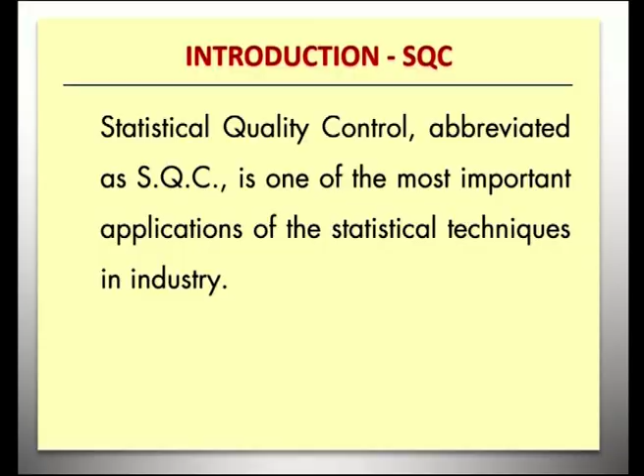Basically, what is meant by SQC? Statistical quality control, abbreviated as SQC, is one of the most important applications of statistical techniques in industry. We have studied various statistical techniques; all those techniques have to be applied somewhere. This important application of statistical technique is done in industry for the concept of quality control. These techniques are based on the theory of probability and sampling, and are being extensively used in almost all industries such as armament, aircraft, automobile, textile, electrical equipments, plastic, rubber, electronics, chemicals, petroleum, transportation, medicine - everywhere statistical techniques are applied.

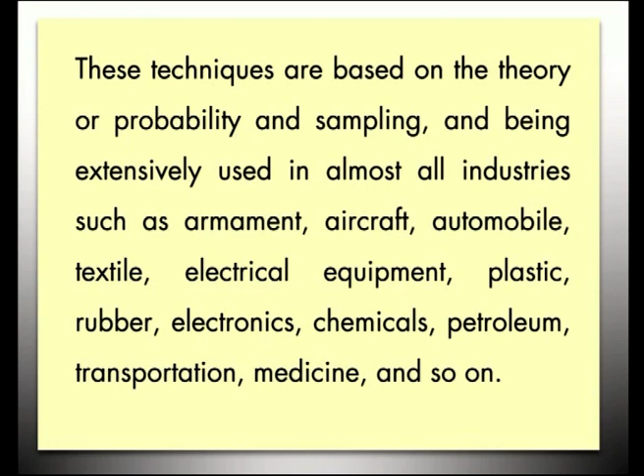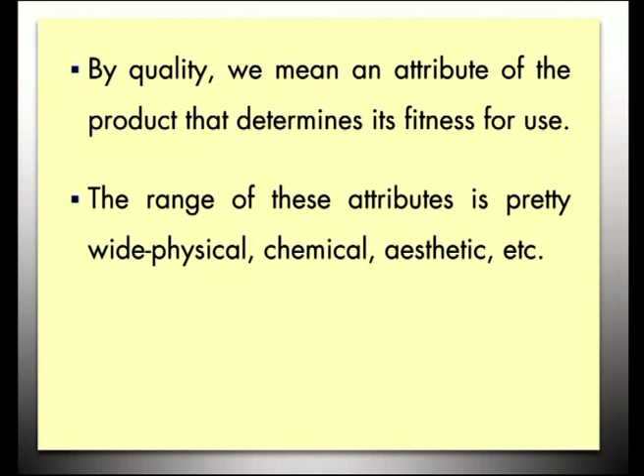By quality, we mean an attribute of the product that determines its fitness for use. The range of these attributes is pretty wide: physical, chemical, aesthetic, etc.

The important concept is synergy. What is meant by synergy? A product may have several aspects of quality as well as an overall quality - a particular quality in respect of a particular product - but when you talk about the overall quality compared to other products, it is something more than the sum of its individual quality aspects. So this property is technically known as synergy.

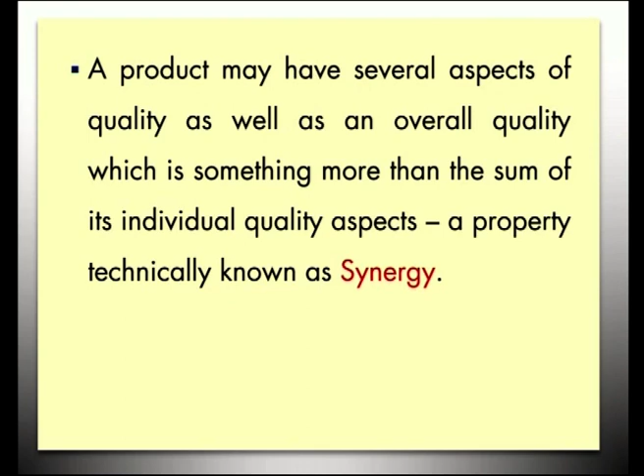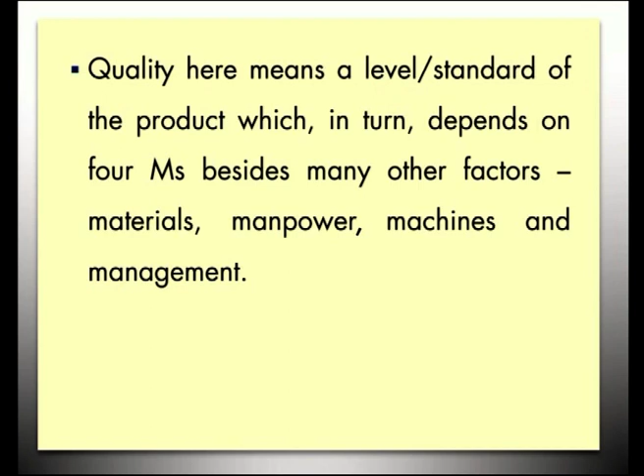So quality here means a level or standard of the product, which in turn depends on 4 M's. What are those 4 M's? That is materials, manpower is the second M, machine is the third M, and management is the fourth M. So actually, quality control is a powerful productivity technique for effective diagnosis of a lack of quality or conformity to settled standards in any of the materials, process, machines or end products.

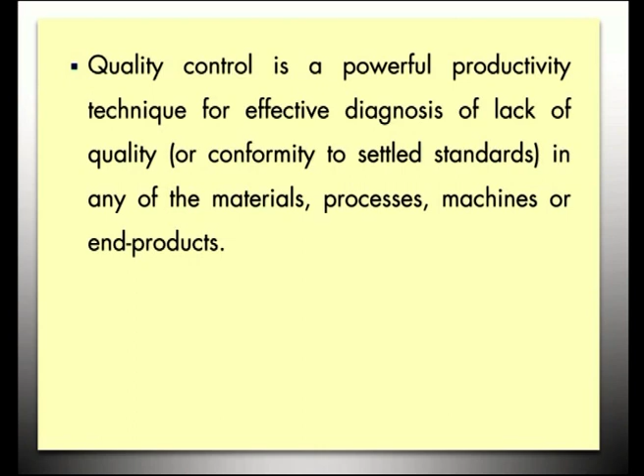In all aspects we have to talk about quality. That is, when you take the material for production, there also we should maintain quality - it should satisfy some kind of specifications mentioned for the material. After the material is applied for production, during the process also we have to talk about quality - again it should conform to settled standards. And when the process is going on, quality of machine also should be talked about, because the process should go on smoothly, so machine should function smoothly without any kind of problem.

So quality of machine is to be taken into account, and after the material is processed through quality machines, we obtain an end product. That end product's quality also has to be checked before it goes to the market. So quality everywhere has to be checked, whether it is for the basic raw material, during the process, the machine, or the end products.

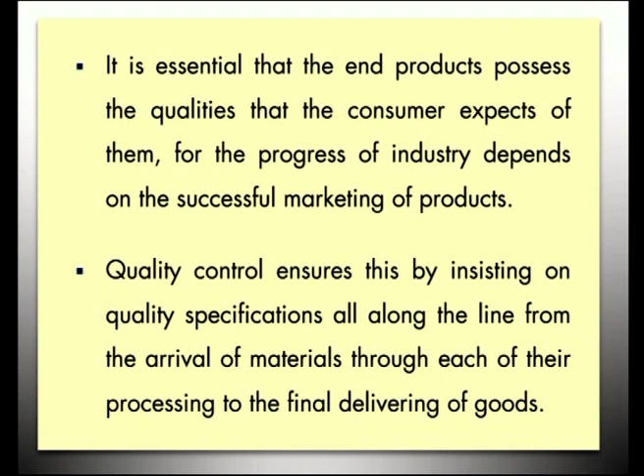It is essential the end products possess the quality that the consumer expects of them, for the progress of industry depends on the successful marketing of products. When the end product is of quality, the product will be successfully marketed and the industry gets its own benefit and profit. So quality control ensures this by insisting on quality specifications all along the line from the arrival of materials through each of their processing till the final delivery of goods.

As we talked about, there are 4 M's that have to be taken into account when we talk about quality control - materials, manpower, machine and management. So quality control therefore covers all the factors and processes of production, which may be broadly classified as follows. First of all, quality of materials: material of good quality will result in smooth processing, thereby reducing waste and increasing output, and giving better finish to the end product.

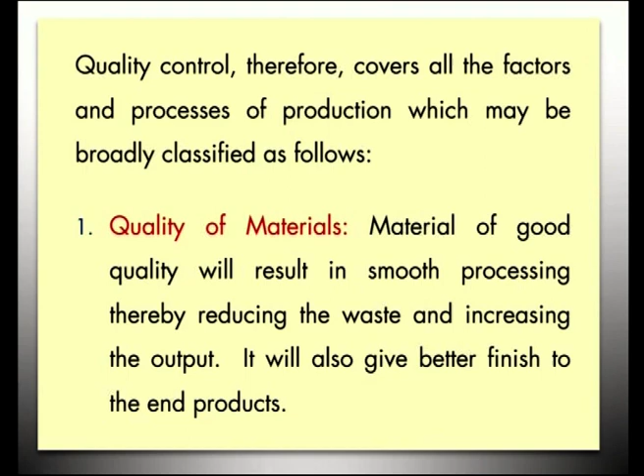Then next, quality of manpower. Who has to process the material? Somebody else has to process it, so manpower is very important when you talk about quality. That is, trained and qualified personnel will give increased efficiency due to better quality production through the application of their excellent technical skills, and also reduce production cost and waste.

If the personnel is not trained or qualified, then we may process the material so many times by trial and error method, and this will increase the waste products. So, trained and qualified personnel is very important because their application of skills will give better quality production and it will ultimately reduce the production cost as well as the waste.

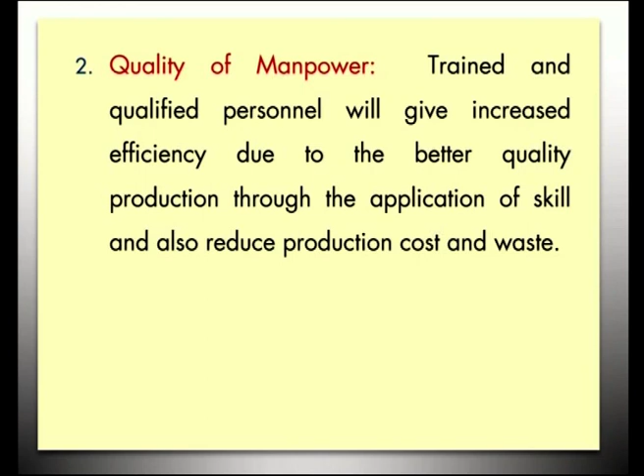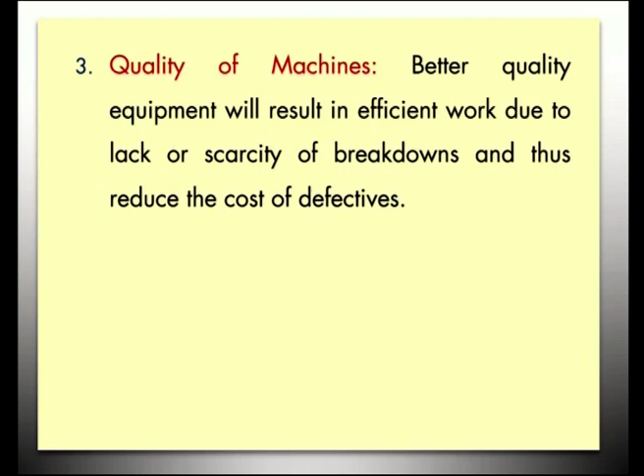Next, third M is machine. Quality of machines. Better quality equipment will result in efficient work, because once a machine breaks down, there is always a wastage of time, manpower, and materials. A smooth functioning of the machine will result in efficient work. Therefore, maintenance of machines with good quality is very important. Thus, it reduces the cost of defectives when quality machines are used.

The fourth M is management. Quality of management. A good management is imperative for increase in efficiency, harmony in relations, and growth of business and markets.

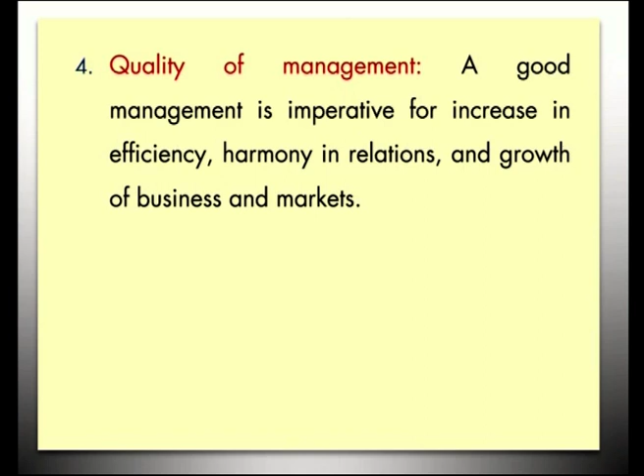What is the purpose of statistical quality control? That is, what is the basis of statistical quality control? Why the word SQC has come up, that has to be studied. The basis of statistical quality control is the degree of variability in the size or the magnitude of a given characteristic of the product.

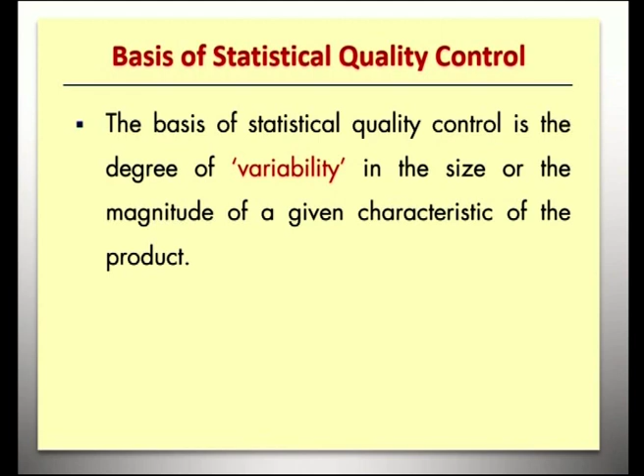Next, very important thing is what are the variable causes of variations in quality. Why the particular product is not up to the standard specified by the quality, we have to check about what are the causes of variations in quality. So, variations in the quality of a manufactured product in the repetitive process in industry is inherent and inevitable.

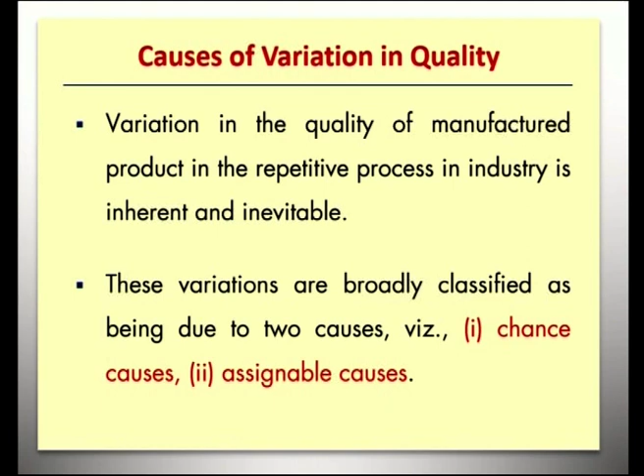So, the variations are broadly classified into two causes, that is chance causes and assignable causes. First of all, chance causes. Some stable pattern of variation or a constant cause system, which is very standard, we call it chance causes, is inherent in any particular scheme of production and inspection.

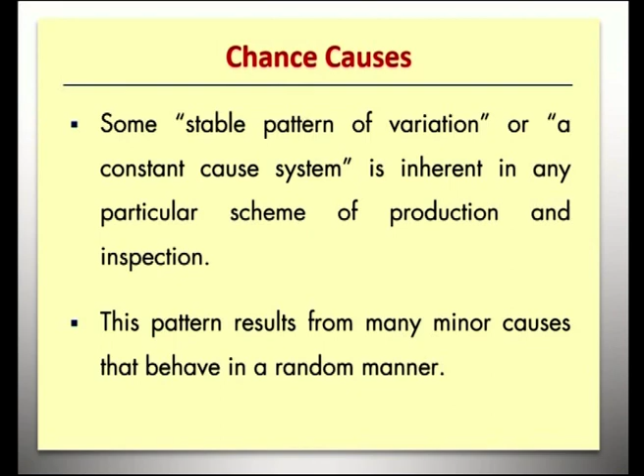This pattern always results from many minor causes that behave in a completely randomized manner. The variation due to these causes is beyond the control of human hand and it cannot be prevented or eliminated under any circumstances. So, we have to go along with the quality, keeping in mind the chance causes, keeping them in control so that it does not affect the quality of the end product. One has got to allow for variation within this stable pattern, usually termed as allowable variation.

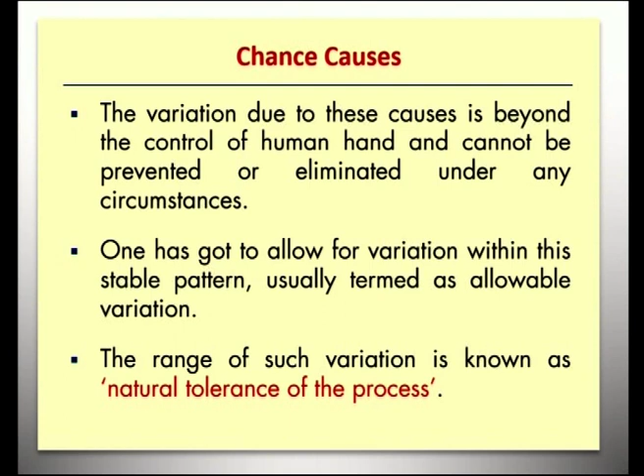So, the range of such variation is always called the natural tolerance of the process. We have to tolerate these causes because it cannot be eliminated, and we have to go along with the quality so that the end product is not much affected.

The next cause of variation is assignable causes of variation. This type of variation attributed to any production process is due to non-random, or so-called assignable causes, and is termed as preventable variation. When these causes of variation are present, they must be eliminated.

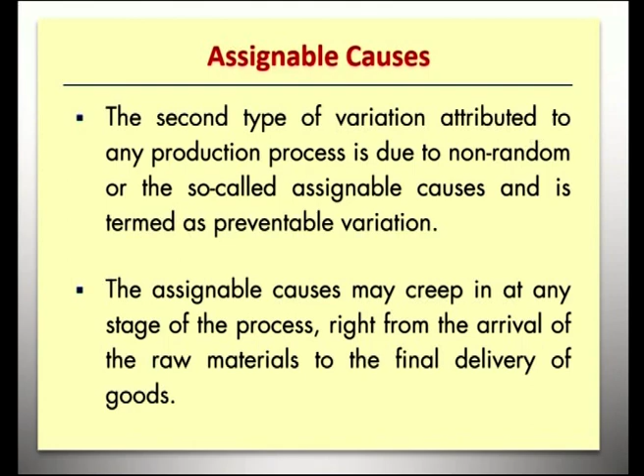The assignable causes may creep at any stage of a process, right from the arrival of the raw materials to the final delivery of goods. This has to be eliminated and it can be eliminated. Some of the important factors of assignable causes of variation are substandard or defective raw materials, and new techniques introduced for better production which are tested by trial and error method. These kinds of variations are called assignable causes of variations.

Also, another assignable cause of variation is negligence of the operators, wrong or improper handling of machines, faulty equipment, and unskilled or inexperienced technical staff. These are assignable causes of variations and they can be prevented.

For example, when you check the quality of raw materials, the first assignable cause, defective raw materials, can be eliminated. When you apply a new technique, if the quality is not maintained, just avoid using the new technique. If the operator is negligent, then you have to completely terminate the operator. If wrong and improper handling of machines is a cause of variation, then you have to be careful in handling the machines very carefully.

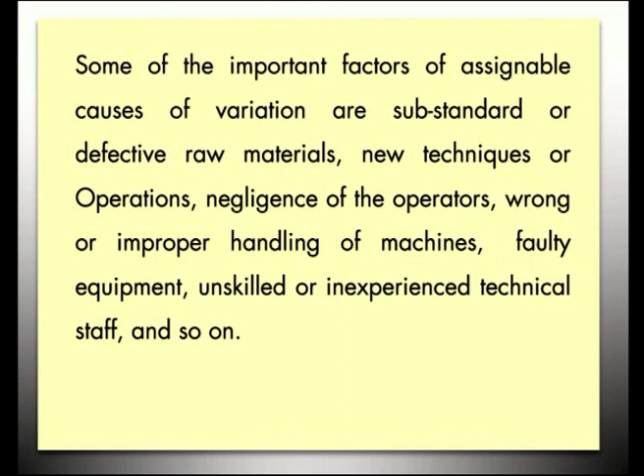And if there is faulty equipment, that equipment has to be avoided for production. If unskilled and inexperienced technical staff is present, then those staff have to be replaced with skilled or experienced technical staff for better production and quality production.

So, these causes can be identified and eliminated, and it is very important that they are discovered in the production process, that is, before the end product comes out, before it goes wrong, before the production becomes defective. Now, when you compare the chance causes of variation and assignable causes of variations, the following factors are compared.

Chance cause of variation consists of many individual causes, whereas assignable cause of variation consists of just a few individual causes. Any one chance cause results in a small amount of variation, whereas any one assignable cause can result in a large amount of variation.

Chance variation cannot economically be eliminated from a process, whereas the presence of assignable variation can be detected, and any action to eliminate the cause is usually economically justified.

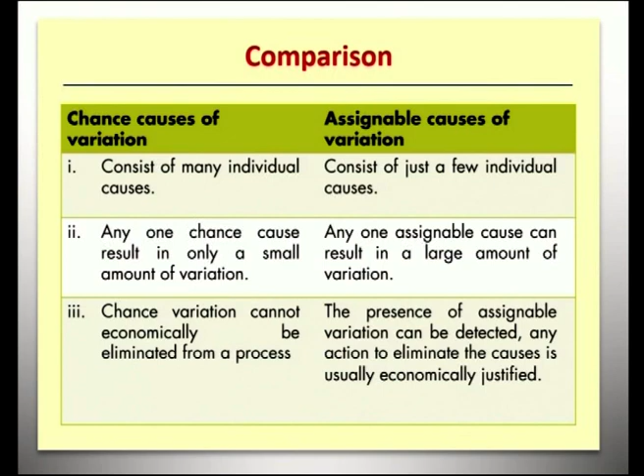Some typical chance causes of variation are slight vibration of a machine, lack of human perfection in reading instruments or setting controls, and voltage fluctuations or variation in temperatures. Whereas typical assignable causes of variation are negligence of operator, defective raw material, faulty equipment, and mishandling of machines.

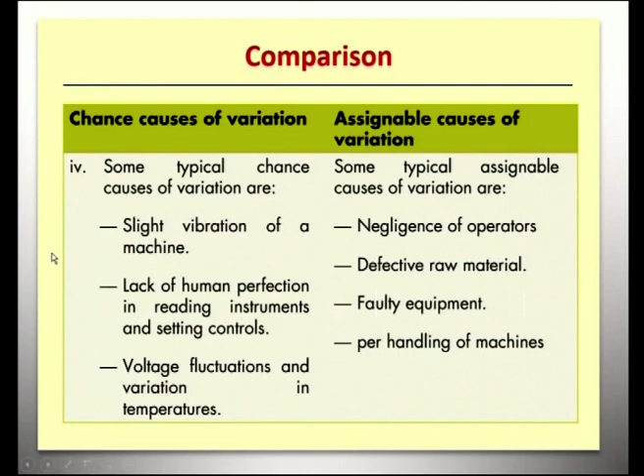Now, after studying about the causes of variation, when should we call the production process in quality control? Quality control in the sense of statistical quality control.

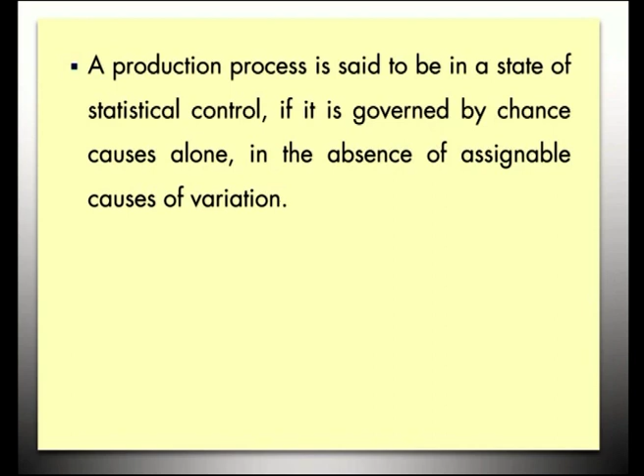A production process is said to be in a state of statistical quality control if it is governed by chance causes alone, in the absence of assignable causes of variation. That is, if assignable causes of variation are present, they must be eliminated, and only chance causes of variation are allowed, then we call the production process in the state of statistical quality control.

The basic definition given by Duncan is: SQC, statistical quality control, may be broadly defined as that industrial management technique by means of which products of uniform acceptable quality are manufactured. So, uniformity is very important and quality is important.

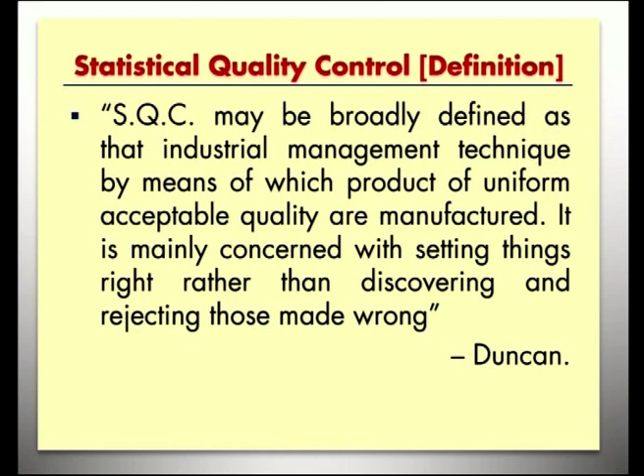It is mainly concerned with setting things right rather than discovering and rejecting those made wrong. So instead of discovering and rejecting afterward, we have to set it right beforehand. That is what Duncan says according to statistical quality control.

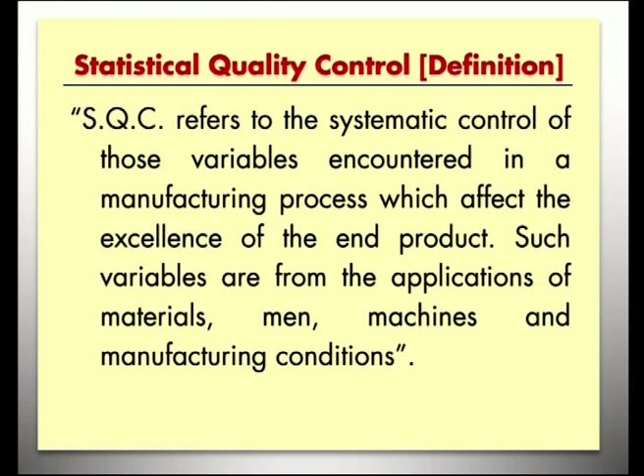Another author has given the definition for statistical quality control: it refers to the systematic control of those variables encountered in a manufacturing process which affect the excellence of the end product. Such variables arise from the applications of materials, men, machines and manufacturing conditions.

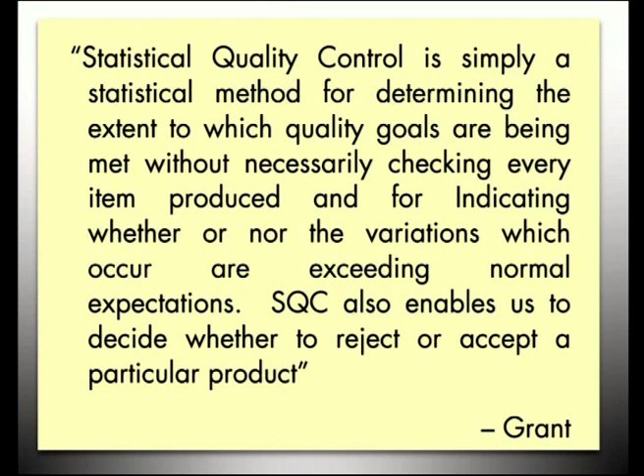Another author called Grant has given the definition as simply a statistical method for determining the extent to which quality goals are being met without necessarily checking every item produced, and for indicating whether or not the variations which occur are exceeding the normal expectations. So SQC also enables us to decide whether to reject or accept a particular product.

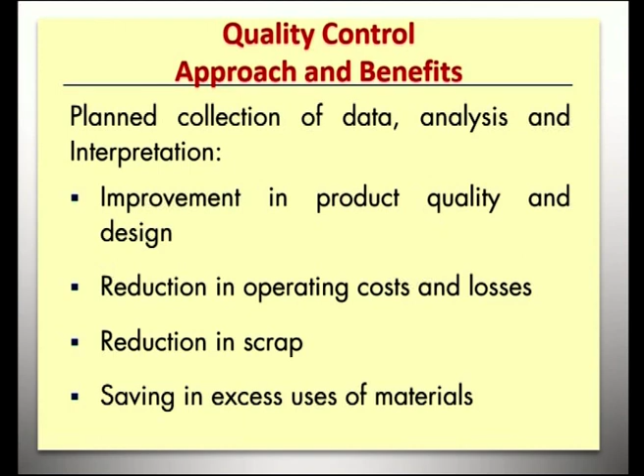Quality control: how to approach quality control and what are its benefits. A planned collection of data, analysis and interpretation, improvement in product quality and design, reduction in operating costs and losses, reduction in scrap, saving in excess use of materials, removing production bottlenecks and reduction in inspection.

Often stopping the procedure and inspecting also causes quality defects. Therefore, reduction in inspection, evaluation of scientific tolerances, improvement of employee morale - that is, by giving them allowances the employee will be happy enough to operate the machine - improvement of employee morale, maintenance of operating efficiency, quality consciousness, greater customer satisfaction - all these lead to enhanced productivity.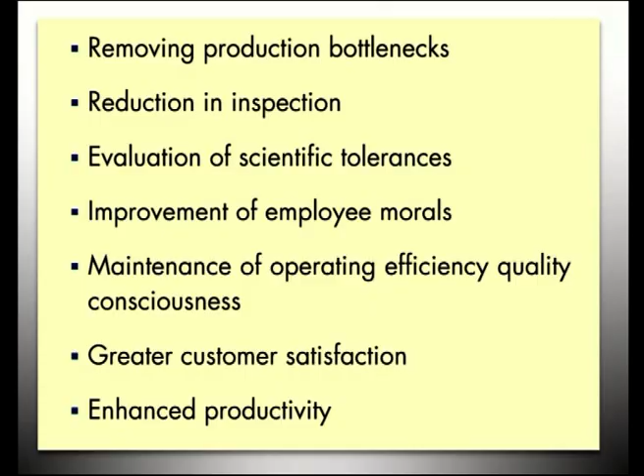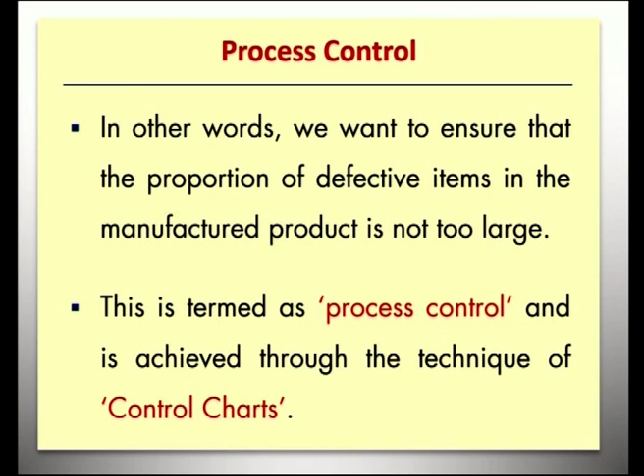Now, there are two types of statistical quality control: one is process control, another is product control. In other words, we want to ensure that the proportion of defective items in the manufactured product is not too large. This is termed process control, and is achieved through the technique of control charts.

The next one is product control. By product control we mean controlling the quality of the product by critical examination at strategic points, and this is achieved through sampling inspection plans.

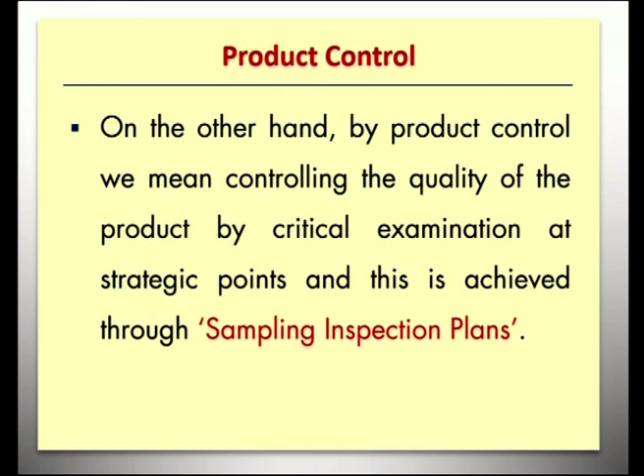So the first few episodes will cover process control, that is drawing various control charts, and the next episodes will cover various kinds of sampling inspection plans. Hereafter we will be studying in detail about process control and product control.

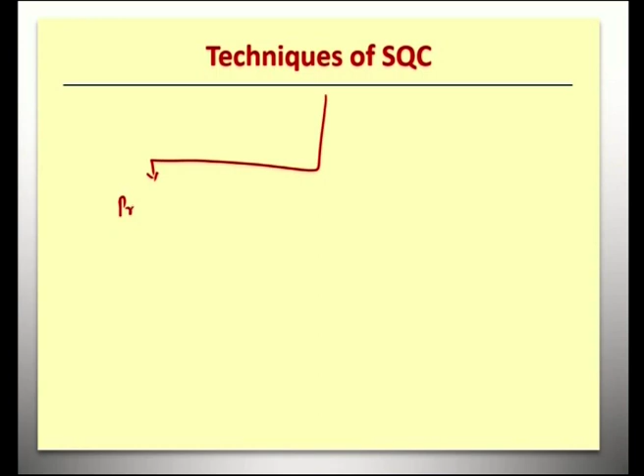First of all, we talk about process control. The basic techniques of SQC are broadly classified into two parts: one is process control and the other is product control.

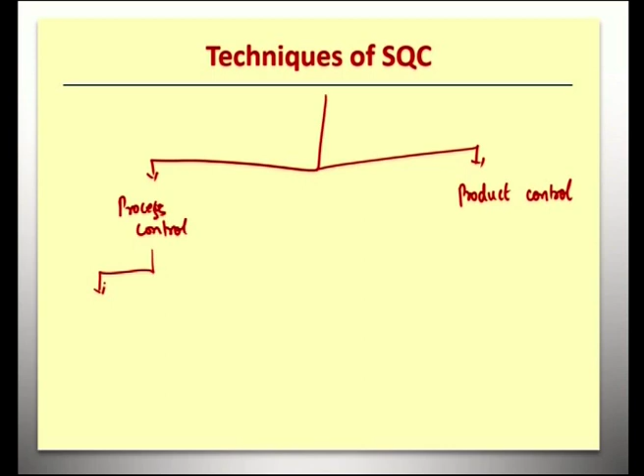When we talk about process control, this is done with control charts, and product control is done with sampling inspection plans.

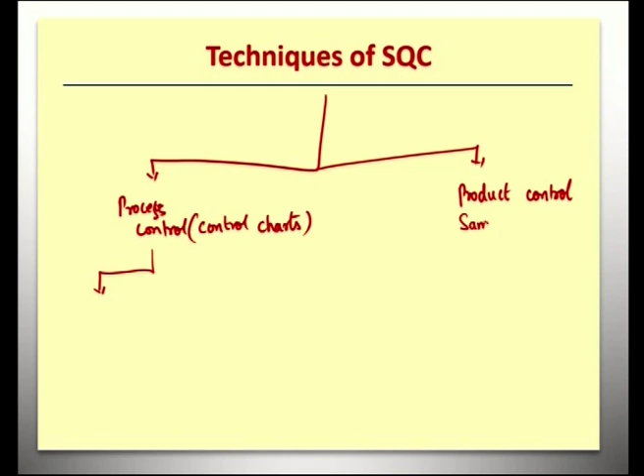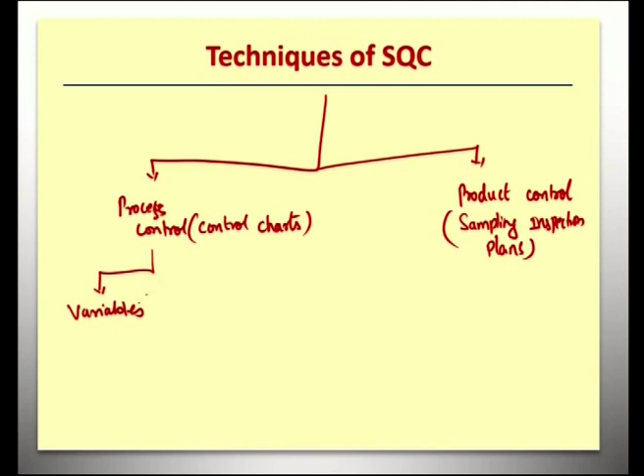Control charts are divided into two parts: control charts for variables and control charts for attributes. The term attributes we have seen in one of the courses called Statistical Methods too.

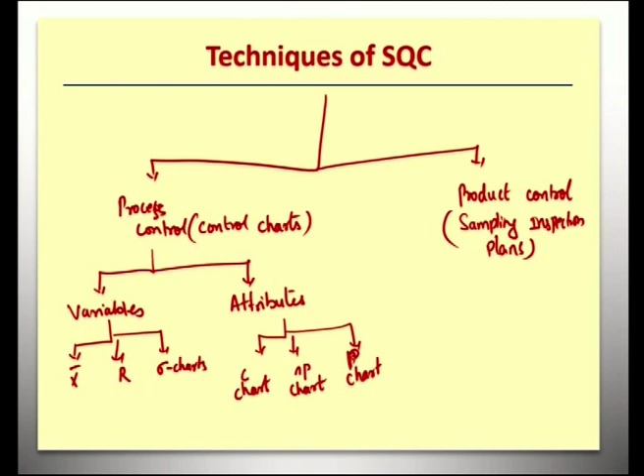Okay, so all these we are going to discuss. We are going to discuss about X bar chart, R chart, sigma charts with respect to control charts for variables. And in attributes, control chart for attributes we are going to talk about C chart, NP chart and P chart.

In product control, we are going to talk about sampling inspection plans for attributes and sampling inspection plans for variables.

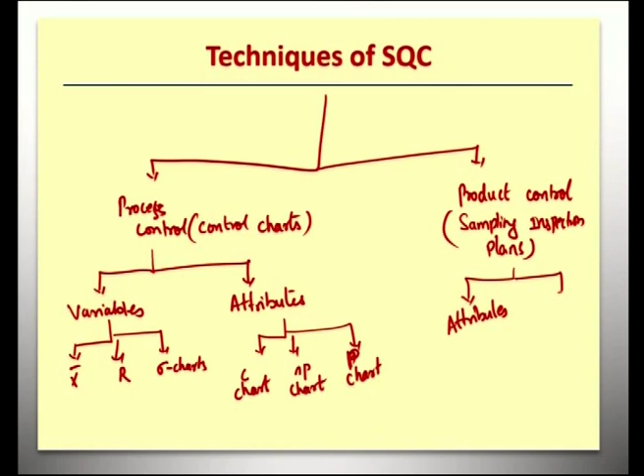Control limits or specification limits and tolerance limits. Process control, that is we will talk about control charts. So for control charts, these three types of limits are very important: control limits, specification limits and tolerance limits. We will see one by one what these limits are called.

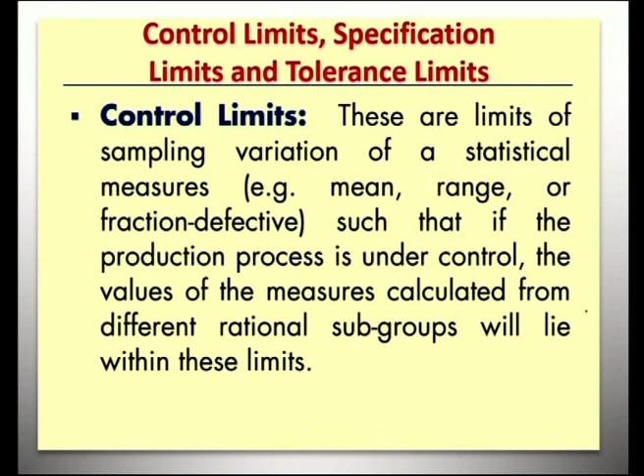Control limits are limits of sampling variation of a statistical measure, for example mean, range and fraction defective, such that if the production process is under control, the values of the measures calculated from different rational subgroups will lie within these limits. Then we say the whole process is under statistical quality control.

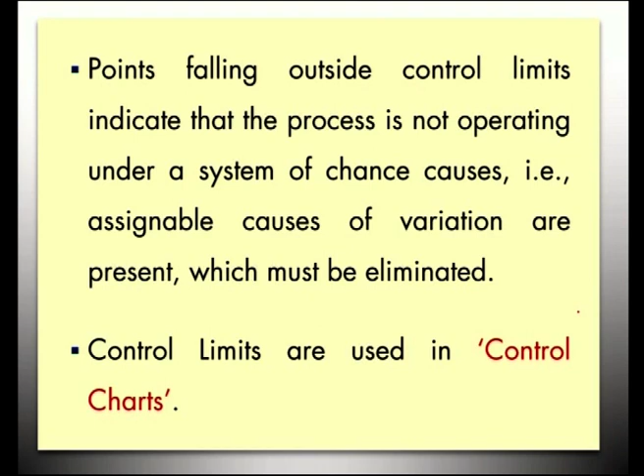Points falling outside control limits indicate the process is not operating under a system of chance causes, that is assignable causes of variations are present and it must be eliminated. So control limits are used in control charts.

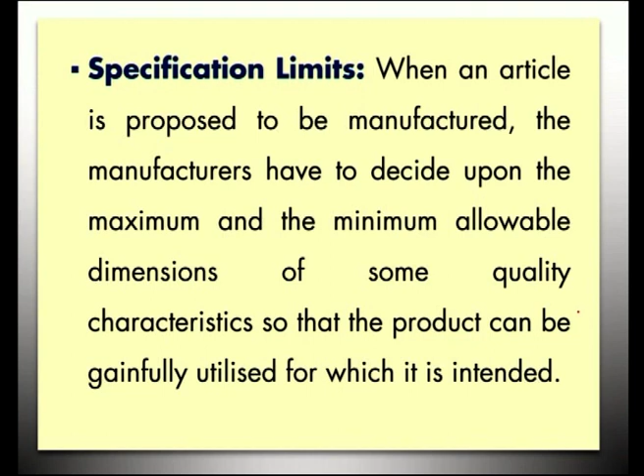The next one is specification limits. We have to specify what are the limits allowed. So when an article is proposed to be manufactured, the manufacturer first of all has to decide upon the maximum and minimum allowable dimensions of some quality characteristics, so that the product can be gainfully utilized for which it is intended. If the dimensions are beyond these limits, the product is treated as defective and cannot be used.

So the maximum and minimum limits of variations of individual items as mentioned in the product design are called specification limits. Control limits specify whether the product is in control or not, and specification limits are actually the maximum and minimum limits.

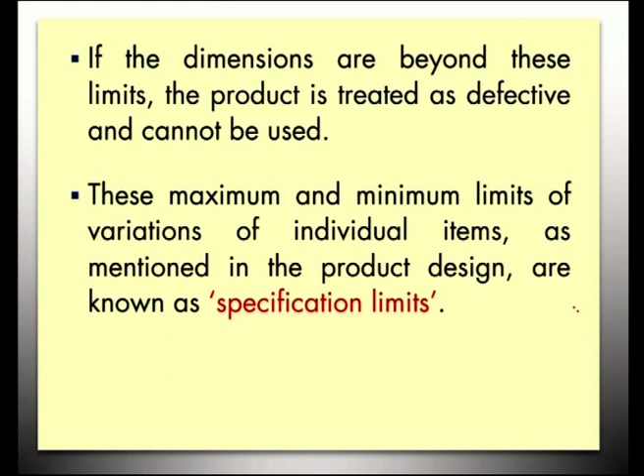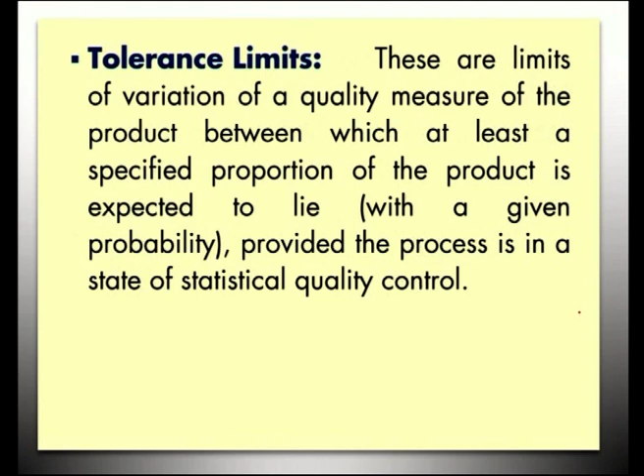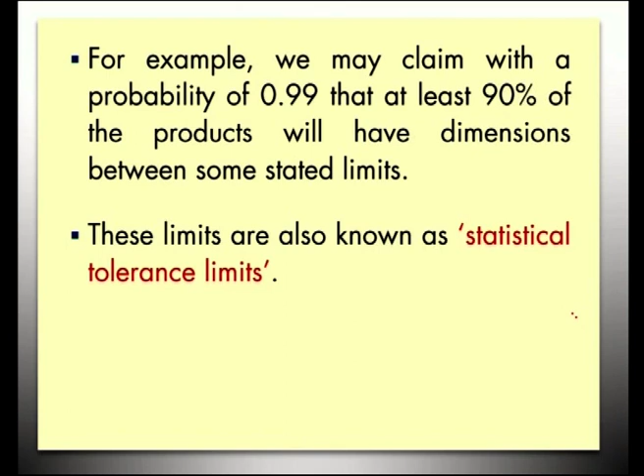Specification limits mention whatever dimensions should not go beyond the maximum and should not go beyond the minimum limits. Next is tolerance limits. These are limits of variations of a quality measure of the product between which at least a specified proportion of the product is expected to lie. That is, so much tolerance is allowed, with a given probability, provided the process is in a state of statistical quality control. For example, we may claim with a probability of 0.99 that at least 90% of the products will have dimensions between some stated limits. So these limits are also known as statistical tolerance limits.

After studying about the limits, we next step in to study about the control charts. The general theory of control charts is that in industry, one is faced with two kinds of problems. What are the two kinds of problems?

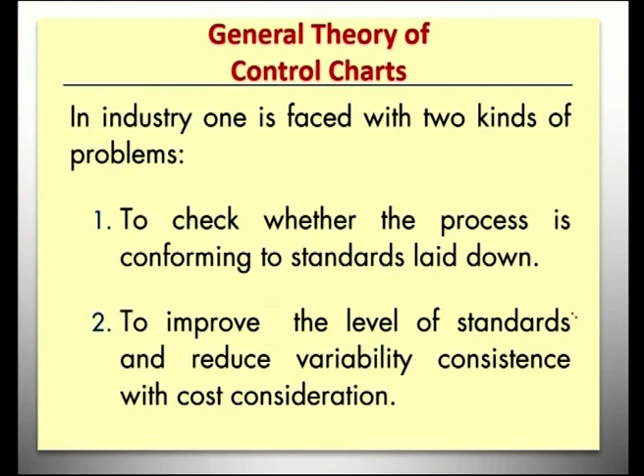To check whether the process is conforming to standards already laid down, and to improve the level of standards and reduce the variability consistent with cost consideration. And Shewhart's control chart provides answers to both the problems.

First of all, control chart is a simple pictorial device for detecting unnatural patterns of variations in data resulting from a repetitive process. Control charts also tell us at a glance whether the sample point lies within the 3 sigma control limits. 3 sigma is the control limit specified.

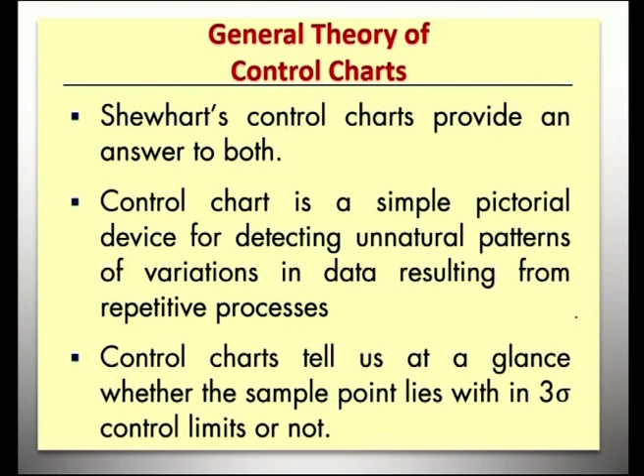Any sample point going outside the 3 sigma control limits is an indication of the lack of statistical control, and we would say the process is not under quality control. In that case, the assignable causes of variations are traced and identified, and at that particular point they will be eliminated.

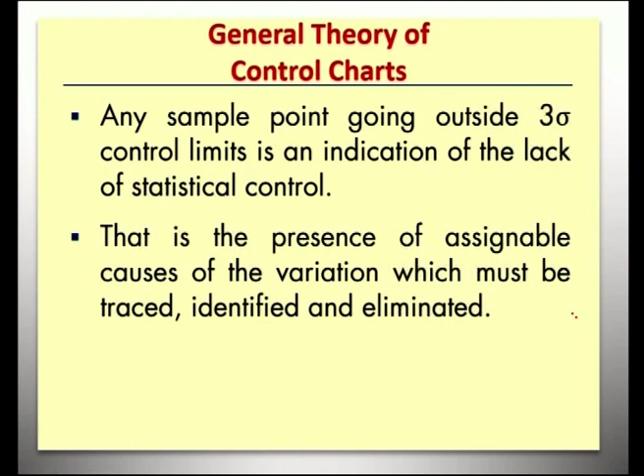When you draw the quality control charts, 4 points have to be taken into account: first of all quality scale, then plotted samples where sample points are plotted in the chart, then sample numbers, and horizontal lines. The horizontal lines are the upper control line, lower control line, and central control line. These are the 3 horizontal lines.

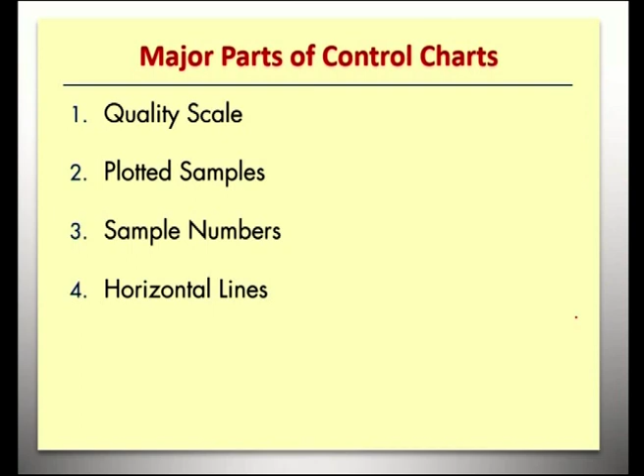In this session, we talked about statistical quality control in various aspects. That is, statistical quality control definitions given by various authors was discussed, benefits of statistical quality control, techniques of statistical quality control, and the major division of SQC, that is product control and process control.

Also, we were discussing about control charts. Control chart basics were discussed, and we also discussed about the major parts of control charts.

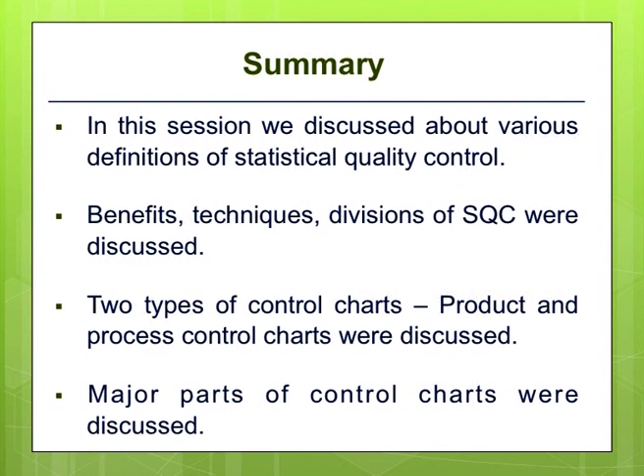Based on the discussion in this session, the following questions may be posed. Define statistical quality control. What are the various causes of variations in statistical quality control? Compare chance causes of variations with assignable causes of variation.

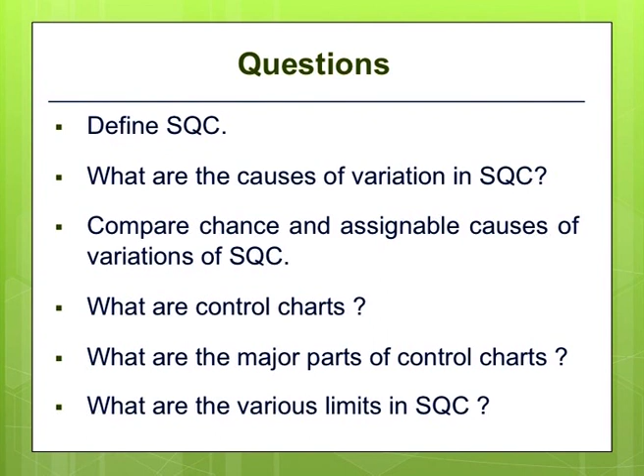What are control charts? And what are the major parts of control charts? What are the various limits in statistical quality control? Thank you.